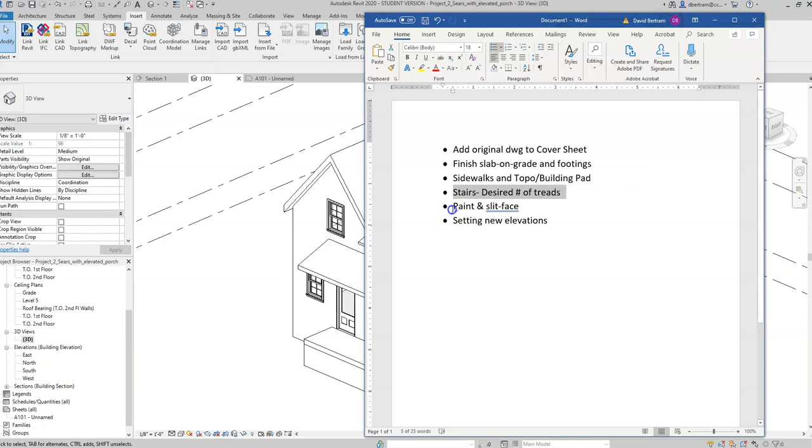So my cheat sheet here: we are going to add the original drawing to the cover sheet, which will look good for presenting the outside. We'll make sure we have a slab on grade in place, add some footings, and resolve the bottom of the house so it looks good in section. We'll add sidewalks and a topo, review stairs and fitting them in these tight houses, add materials, painting, and split face tool, and then add some new elevations. So a lot to cover.

All right, number one, we're going to add the original to the cover sheet. Here's my first image, my first title block. So I will go to image, search for my JPEG that I saved somewhere, and drop it in. That's pretty easy. Now we could easily resize as we see fit. We should make it pretty big, actually.

And then I want to create a camera view that is going to mimic this. So let me jump onto the floor plans—we don't need ceiling plans, let's close that. First floor, and this is the view that I'm going to try to mimic. So let's get a camera in here; we are kind of looking from this side, 3/4 view. So let's just start here, pull it out...

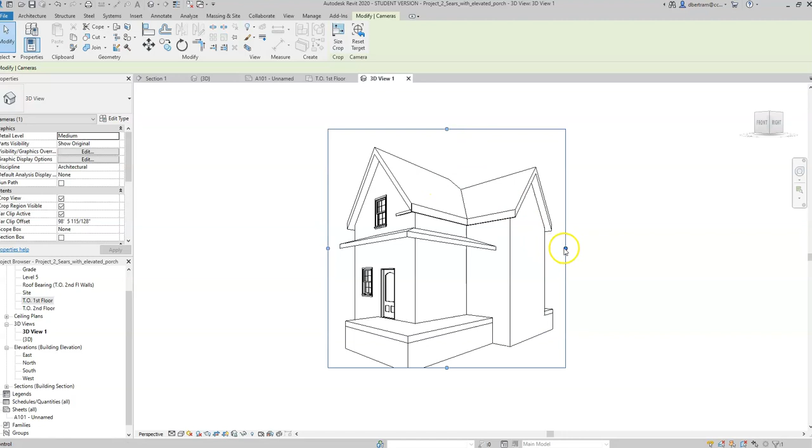Click, and there it is. Let's affect the crop region here, and then we could put that. There's my 3D view 1 I just created. Back to this sheet, 3D view 1, bring it over, click, and there it is.

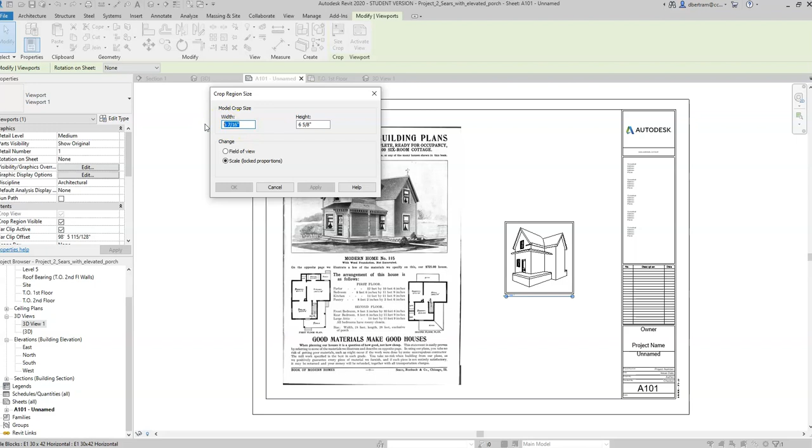Then while we have it selected, we bring up the size crop, move it to scale. Now it is about 6.5 inches. Doubling it would be 13. Let's make it 15 inches, let's see what that looks like, and apply.

Maybe a little tight. There's a good amount of white space, so I will let you fine-tune it. I think that generally looks pretty good. So what I do want to show you regardless of the sizing and whatnot—I'll let you be creative about making it look proper and nice. If anything, this is maybe a little tight, but generally looks okay.

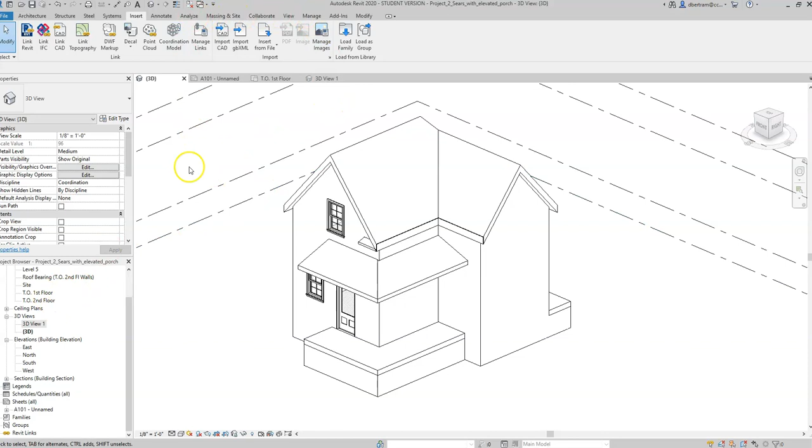But what I do want to show you is how to adjust the camera effectively. So we want a floor plan open, we need that, a 3D view is good. So this is the camera view, this is the 3D view in a section. Let's have these four open and go to the floor plan first, then click here on the view, show the camera, and there it appears while I'm on the first floor plan where I placed it.

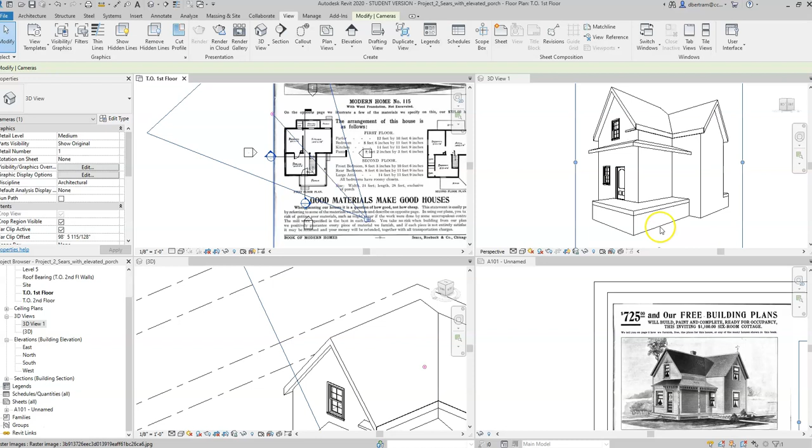And now I could go to view, tile views, and now I can see everything—there's my camera, there is my view that the camera is creating, here is my title block, and the 3D view. So let's just say, for instance, that I want to see more of this right-hand wall. Maybe I feel like I foreshortened it a little too much, and I want to display it a little bit better. So I'm going to come over here and swing it a little bit to the right.

Okay, I don't know if that's better or not, but you get the idea of how to view these. And then also recall that here is the camera, and here we have the eye—that's the photographer's eye, at 9 feet, so a little unnaturally tall, and the target is straight ahead. So if we look at theirs, that's probably not too far off.

Yeah, so you have to experiment with it. So the eye elevation, let's see what 6 feet—something a little closer to an average—now I think that doesn't really help, that makes it feel like we're looking up more. Let's just see what the opposite looks like, 12 feet.

I kind of like that, seeing a little bit more of the top—we could see more of the top of the shed roof there. So you get the gist, that is how we could adjust effectively. So let us go back to the tab view.

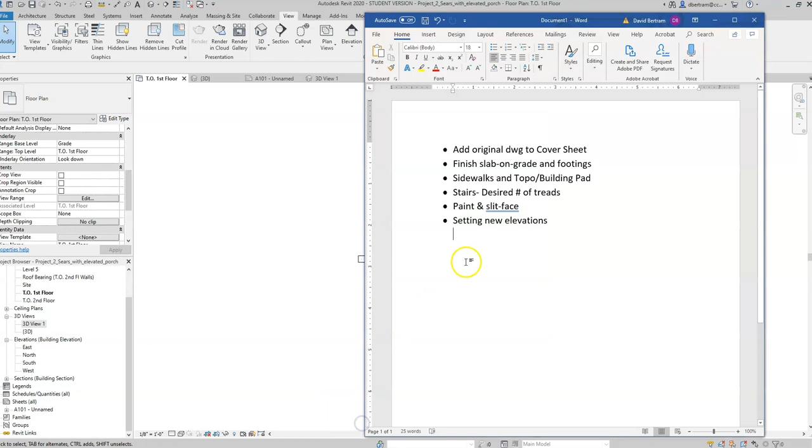Okay, good. All right, next up on the to-do list is finishing the slab on grade and the footings. Okay, so let us take a look at the 3D view.

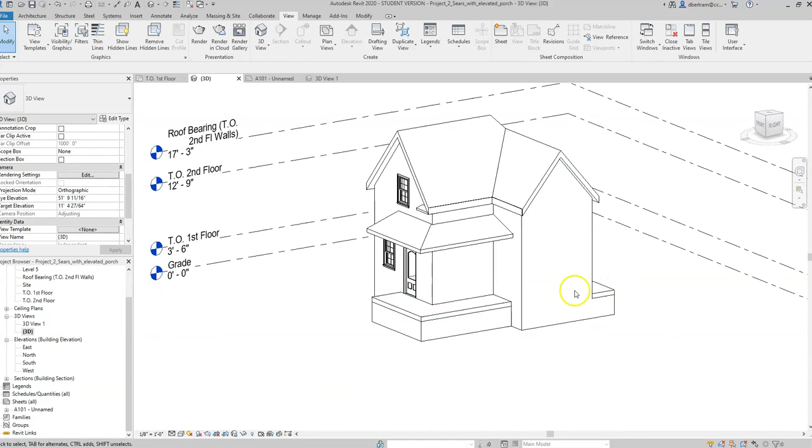Okay, so let's look upside down. We have our porches, front and back, and then our house footprint. When we look from underneath, that is what we see. Here is our house footprint, that's what's holding up the second story, these walls. Then our porches are lighter, they do not carry the weight that these exterior walls are carrying.

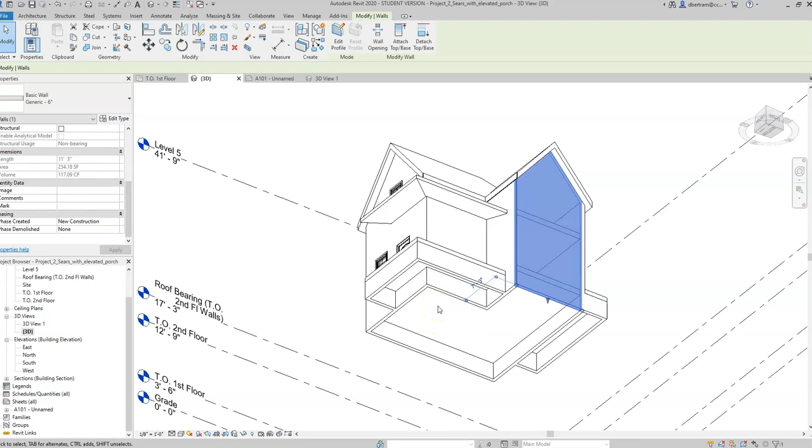So what we want to do is select these. Let's select this, I'm going to hold Control and select the bearing walls for the house. And here in the property box, we're seeing that the top constraint is where I originally set them, to the top of the second floor, and they're starting at grade.

I want them to come down about 3 feet below grade. That's appropriate for here in Pennsylvania. Apply. That is the bottom of the frost line. If you're in Florida, you don't have frost, there's no freezing ground, so these footings could sit right up top. If you're up in Maine or Michigan, the footings would probably be down 5 or 6 feet or so. But here in Pennsylvania, it's 3 feet, so that's where that magic number comes from. And so when I look at buildings in section, that's kind of what I'm used to seeing, so that's why I'm applying that.

These should also come down, so I'm going to do those as well. In real life, these would be built up really with just some columns and not have these continuous walls, but in section, this will be more acceptable than having them go nowhere, sitting on grade, when I say go nowhere.

So the top offset is set. We want the base offset to go to -3 as well, so it'll look a little more believable in section.

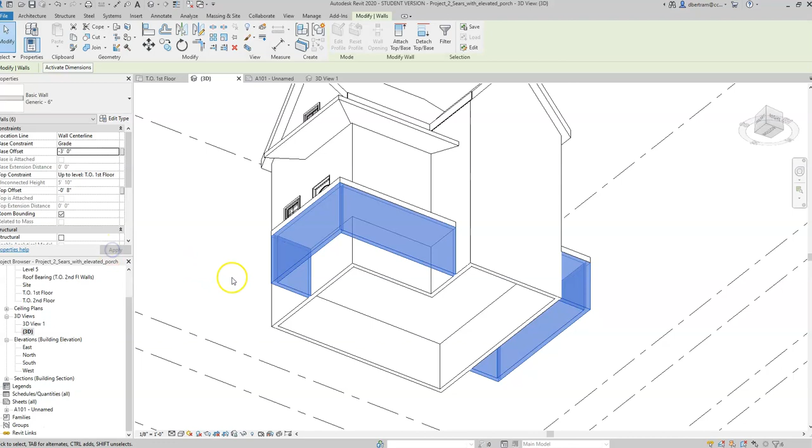And then let us add the footings. So we will come to structure, here are our footing options under foundation. We'll come to the wall, we will find the most modest is a pretty big footing, 24 inches wide.

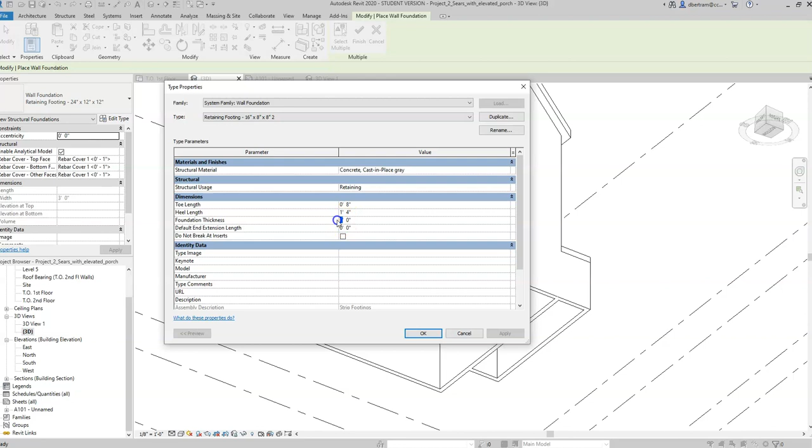So let us edit the type, duplicate it. Let's turn 24 to 16, and then let's go with 8 inches. 12 becomes 8, and 24 becomes 16, and here's our 24 that becomes 16, so that's 1 foot. 16, 1 foot 4, and our toe length 8, and thickness 8. Let's see how this looks.

Okay, and then we just apply them. So one more time, structure, wall footings, and here they come. And this is just for the parts that hold up the house, not for the porches. Okay, let's take a look at that in section. Not bad, not bad.

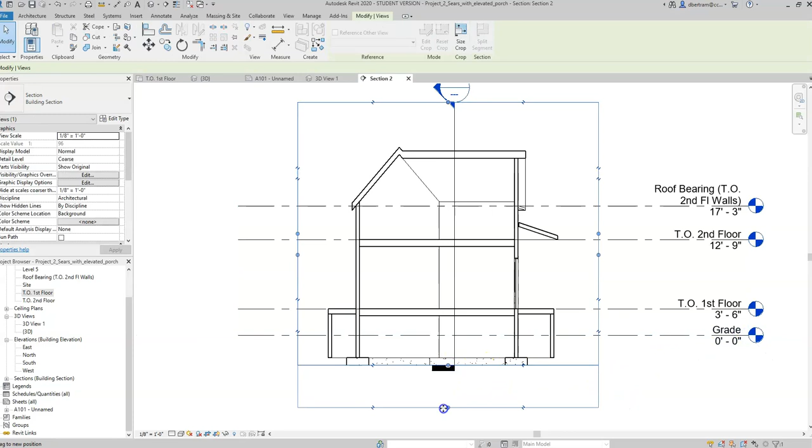And then we need some sidewalks so we could see where grade is. We see the word grade there, but it would help a lot if we could see grade. Let's give us a little more room here, let's open up our bounding box, crop view. Okay, space everything out, a little bit easier to read.

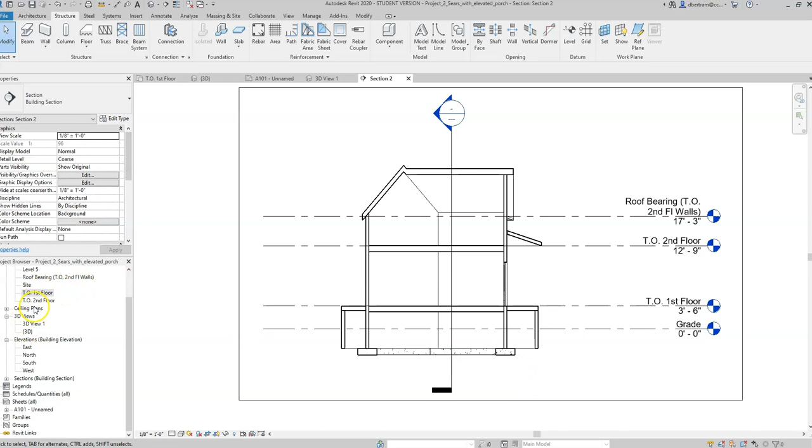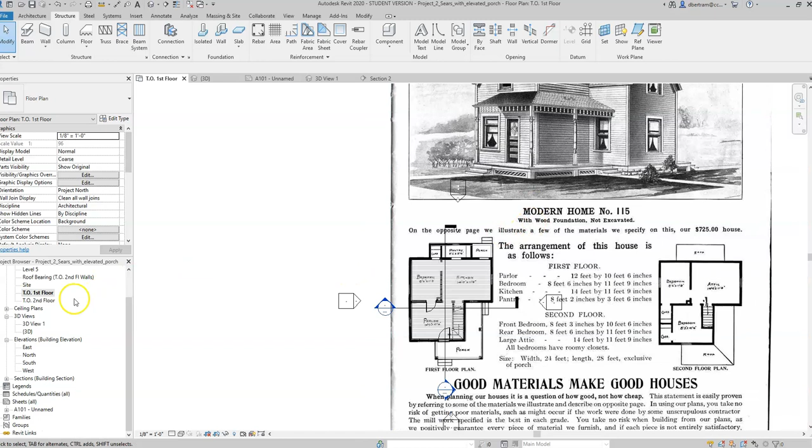Okay, so grade, we want to get some sidewalks. So let's take a look at our plan, and we don't have anything to go on. Some of these old, so we do have this. So we have sidewalks coming straight out both sides, and they kind of put us on a corner lot here. So let's do that. All right, so let us go to, we're on our first floor.

Let's see what this looks like at site. We can't see our stairs. It's a nice roof view, nice roof view, we'll maybe circle back to that, but let's do the work right here. And we could hide this, this is not really offering us much. Hide in view, element. Okay, we could see, hide in view category, again, need a little bit of space.

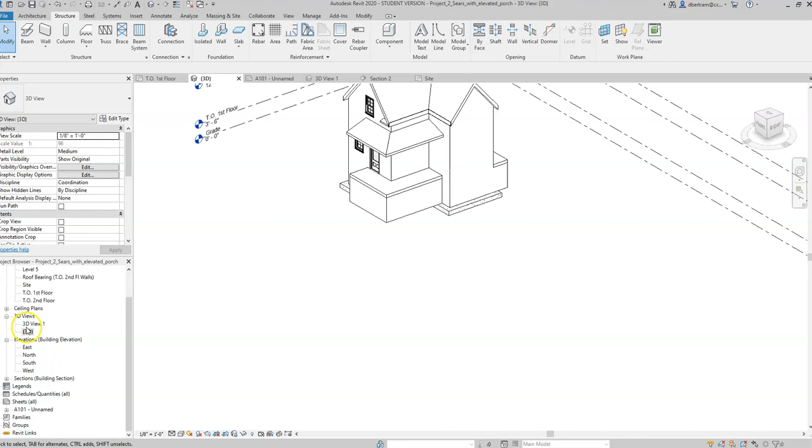Let's take a look at our 3D view. Okay, I do not have stairs yet, let's put some stairs on this, straight ahead there. So architecture, stair options.

I am going to go with, because it's outside, the cast in place. Stairs inside the house should be the assembled stair, that looks best in section. Outside, we'll do a monolithic big concrete piece. We're going from grade up to the top of the first floor.

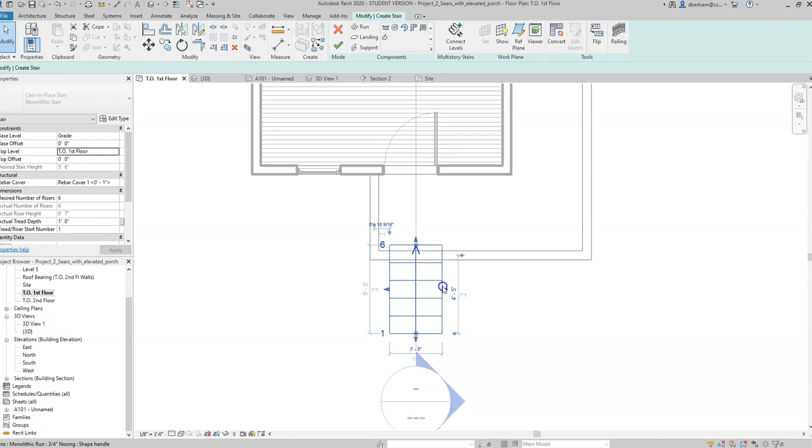We can select, pick it up. Let's just pick a number, let's get a measurement. Let's give it the green light, even though we don't like the size.

Let's say we want our stair to come from the middle of our door to a little off there. 1'10", so that double 1'10", and we get 3'8".

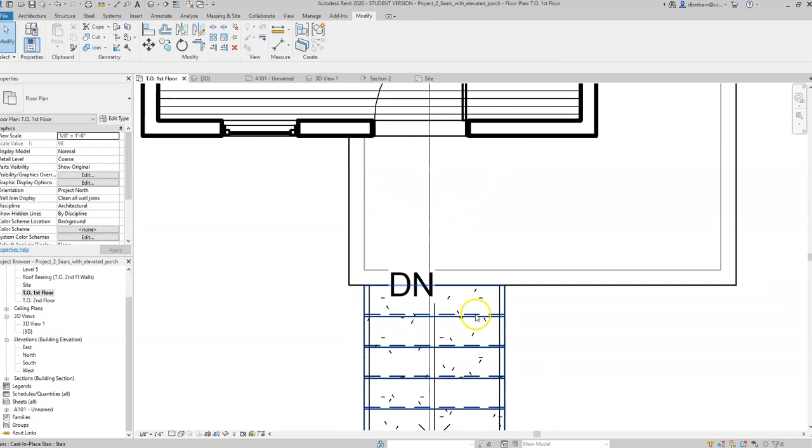Okay, now let's center that. So we have a 3-foot door, and our stairs are a little bit bigger. And give that the green light.

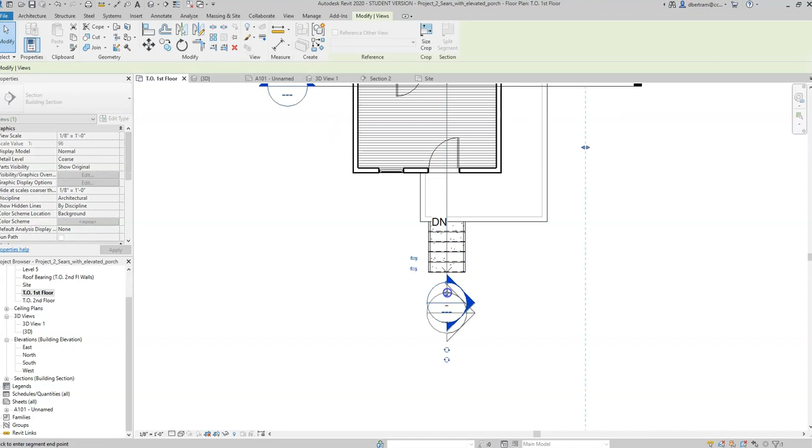Just a little more space. This all got moved about. Okay, and that looks decent. It too would have a foundation, but I think we could let that go. Yes, so looking better. We need some columns, but this is looking better. That's what we should be, about 3 feet below grade.

Okay, so what's next? Let's just take a look at that in 3D, make sure. Oh, so a topo is, oh, and then our topo and sidewalks are next. Okay, so...

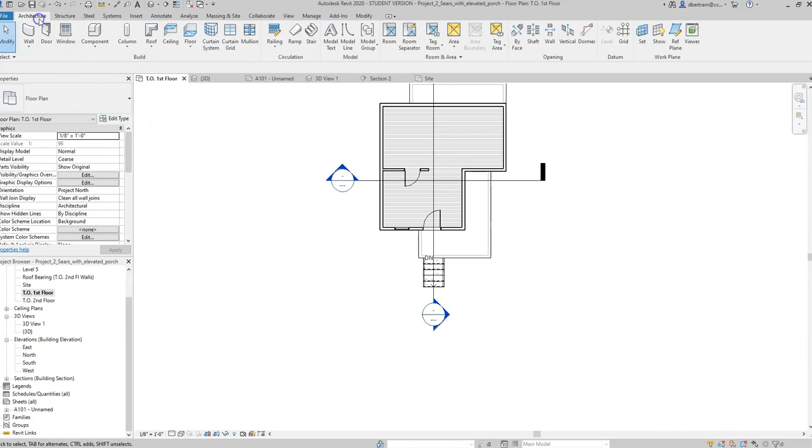Do we really have on this? I'm just going to pretend like there's one staircase. There might have been another staircase here, but I'm going to keep this simple. Okay, so back, we could draw this on the first floor, and so I would just do this as a floor.

Trying to think about what size I want. So we'll just come here, edit, duplicate. Let's just make this, dedicate this just to the sidewalk.

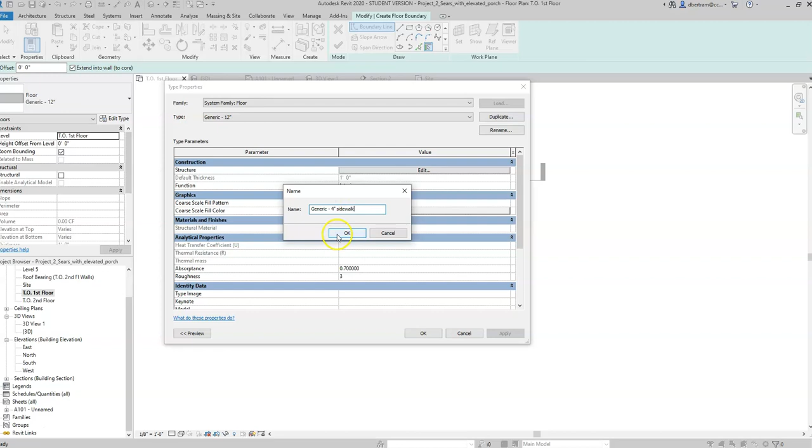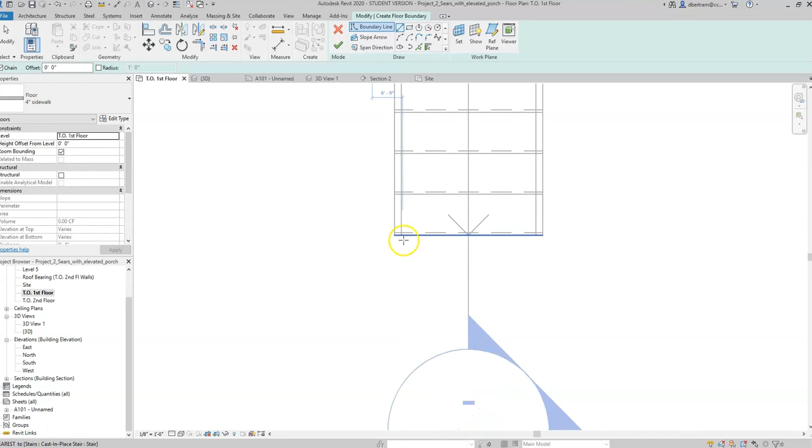Okay, 4-inch sidewalk and some boundary lines. So I'm just going to take it from my imaginary sidewalk, and this I'm gonna put a little angle on it.

So it would be 3 feet would be nice. And I'm just going to come straight up and make it 3'6" on the angle, which doesn't really exactly answer my question. 3'3", so I didn't get my 3, so it's about 3'3". So we're coming here. I'm going to do this by eye and not overly worked up about it.

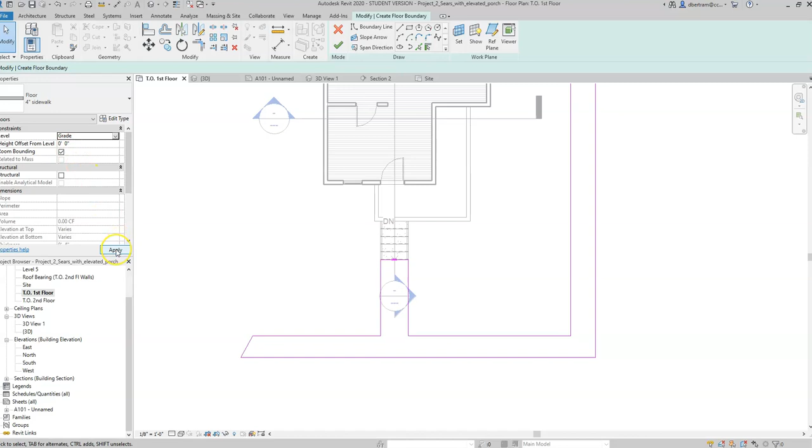This matters, let's. Good. All right, and we are not at the top of the first floor. We are on grade, and that should do it. Apply green light, and take a look outside, and it looks like we have a sidewalk.

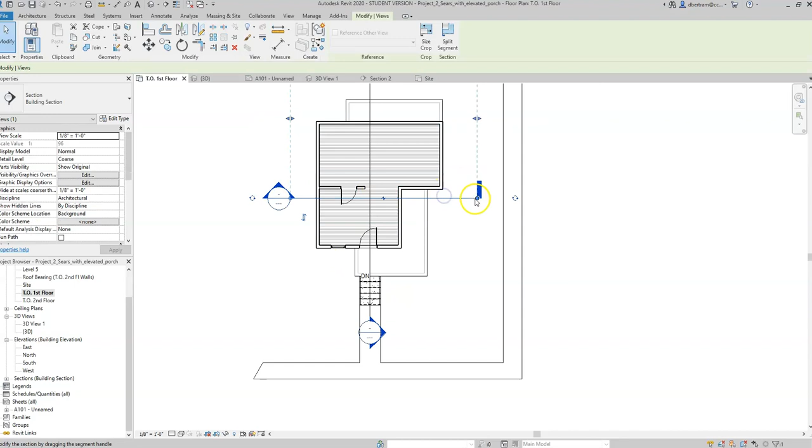Okay, and let's take a look at that in section. All right, that looks good. Now we want to put in some grass and learn a new feature.

All right, so let's jump back to our first floor plan and let's put in a topo. Okay, so this would be under, where does this live? Massing and Site. Massing and Site, Topo Surface. Okay, so they're not on view here. They typically like us on our site plan.

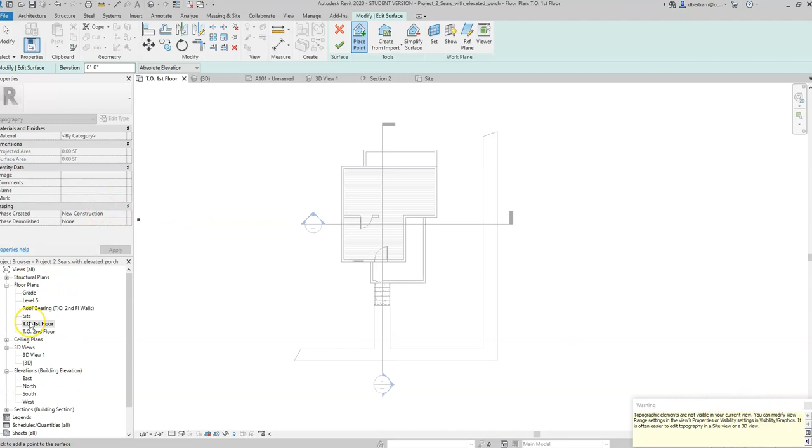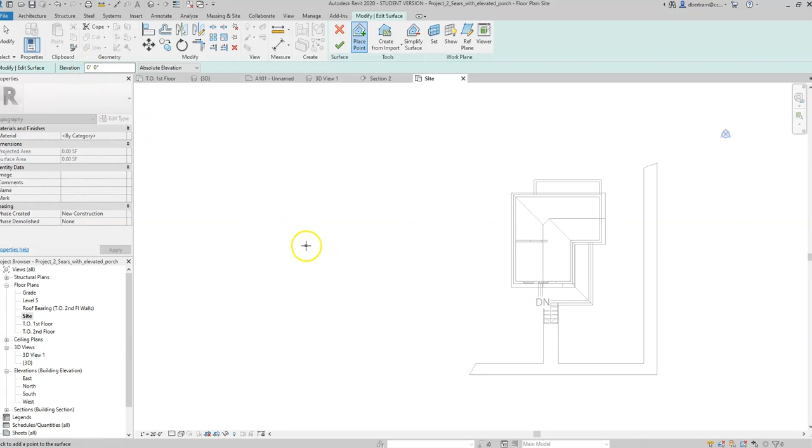All right, I'm just going to jump out of that. I want to hide these things. All right, one more time. Topo Surface, good. All right, so let's make this a wireframe so we could see. And what we're doing is adding a three-dimensional surface, and I'm going to do one right on the side to make this clear. So drawing some earth, and all those elevation markers are coming out at 0, 0.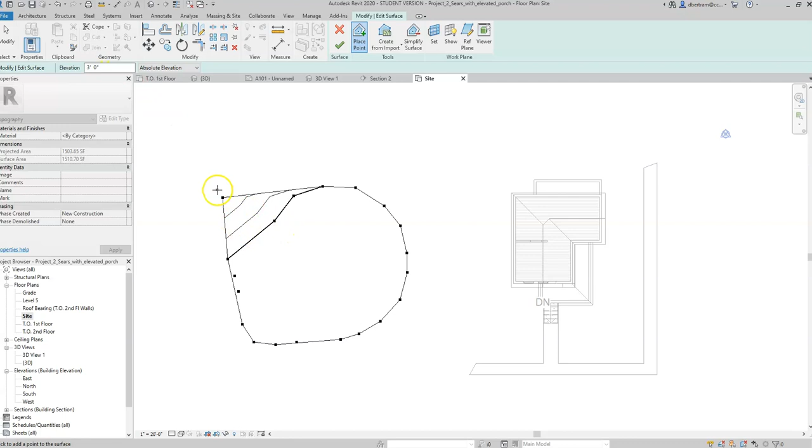Now if I add one, let's just add one that's 3 feet tall. And now you could see those grade lines that are appearing. And then if we look at it in 3D, and then give it the green light, let's actually first look at it right in elevation. So my elevation markers are not showing it.

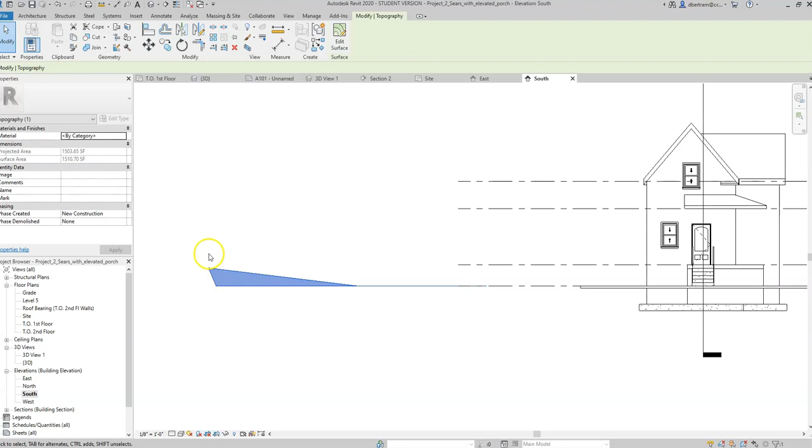Super quick. There. Okay, so all those elevation markers had this were set at 0, and that's why this is all flat. And then I dropped in that one 3-foot one, and it jumped right up to here. So one of them is at 3 feet, and the others are all laying perfectly flat.

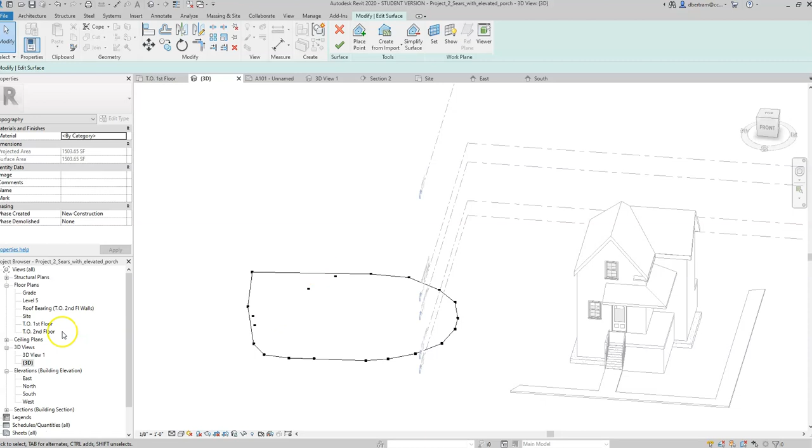And then I could select this element, edit the surface, select that guy. That's the 3 foot. I could take him back down to 0. Did that work? Yes, that should have worked. And then if I look at it again in elevation, I forget which elevation I was able to actually see that thing in. There it is. It's all lying on grade.

And then back to the site. And then if I wanted to place a new point, I could come here, and then I could drop a 3 foot right in the middle. And now I'm kind of creating, I just put like a tent pole right underneath my carpet or underneath the sheet there, and then it just pushed it up so that I have a kind of a tent, and you kind of see it.

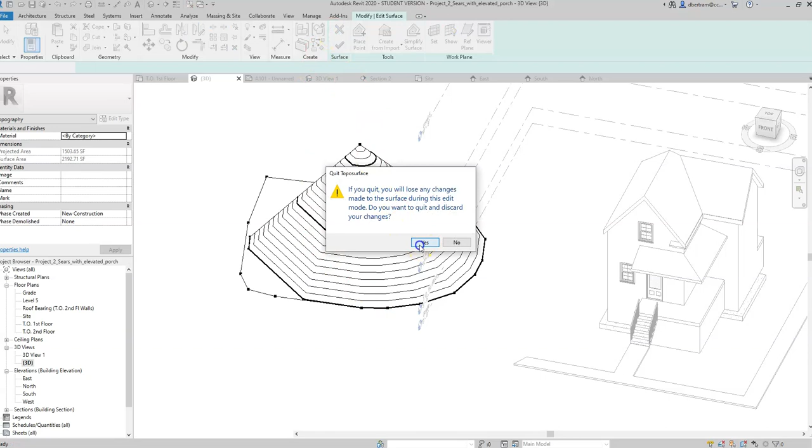Let's exaggerate that. At 3 feet, let's make it 23 feet. There we go, so there's my tent. Okay, so now we can do away with that. That is the gist of them. The way I just drew this is super flat, so we're not going to have any such adventures as building kind of pyramids in the dirt.

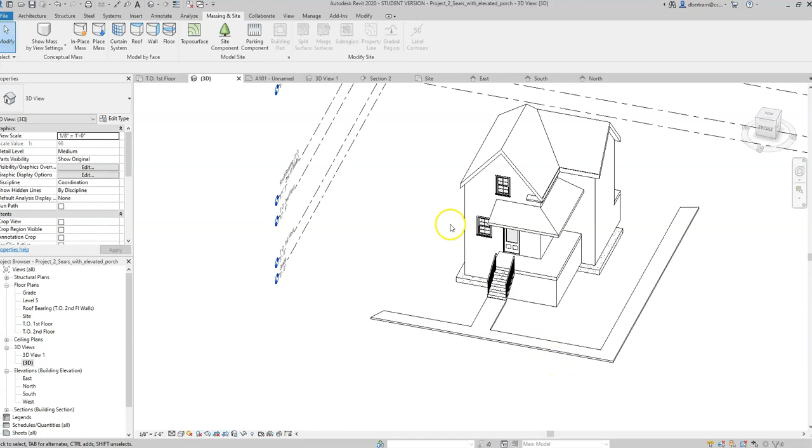But nonetheless, it's a good exercise to go through, and we could keep it simple. You could play with it all you want. Actually, you could set up a backyard if you want.

But I set up the earth to be very flat on these two sides, but then maybe we could taper off and do something on the other side.

So let's jump into site, and I put this on wireframe because it was showing me just the roof plan. When I put those points down, I have to get all the way up against the house, so I cannot drop it at the edge of the roof, otherwise there will be no dirt connected to the house. So wireframe, Toposurface, we will put this, let's take a quick look at elevation.

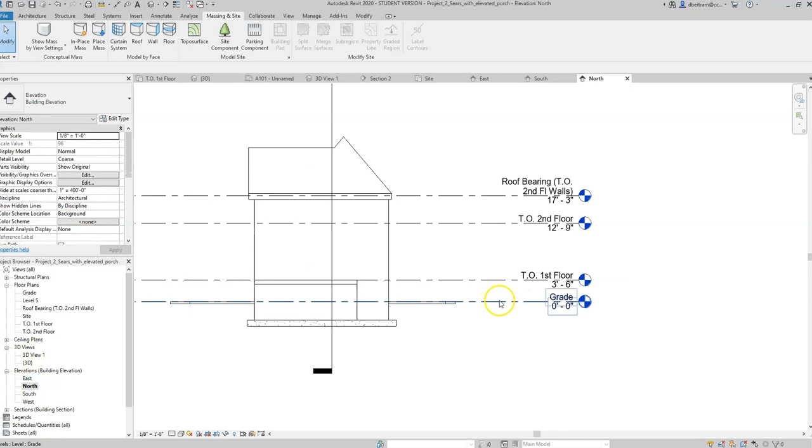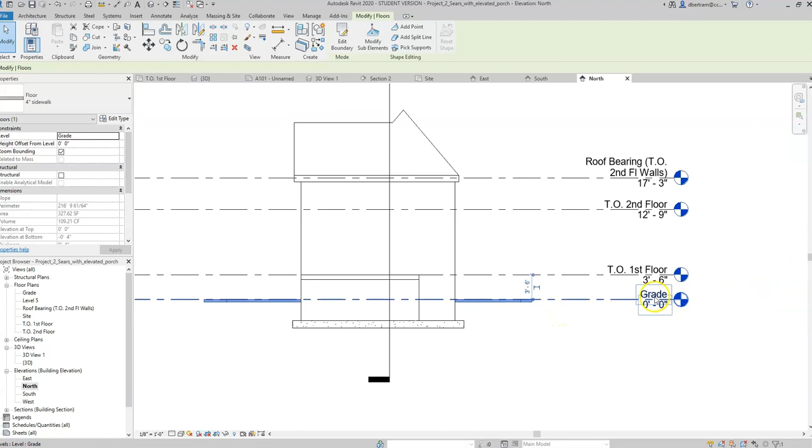Let's just cancel that one more. So we will put this at, the sidewalk is coming in at grade, and I would like the earth to be about 2 inches below that. So I'm going to put the earth at -2 inches below grade. So grade here actually represents my top of sidewalk. So this is not the best title really, this would be kind of top of sidewalk, and grade's a little bit below that.

And I'm not going to change this because I have stairs that are properly connected to it, so I don't want to undo the stairs. So I'm just going to cheat my earth down 2 inches.

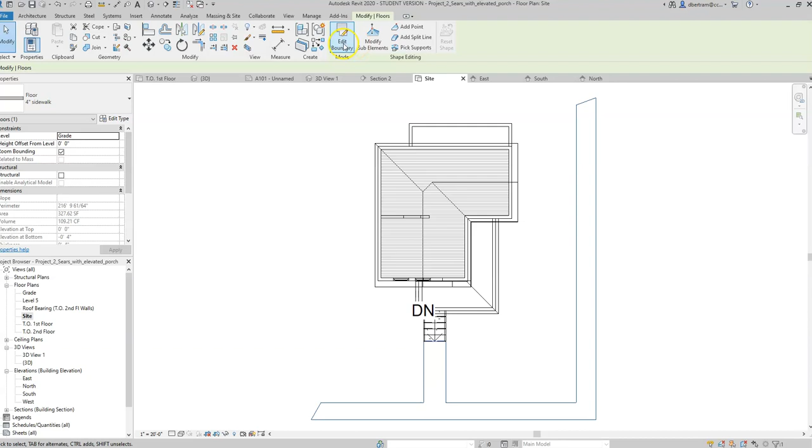So back to site, and let us, where are we? Are we in edit boundary? What do I have selected? Here we go, Topo, and we are going to.

Negative 2 inches, and that's relative to grade. And this is going to take us, so again, a little tricky. We have, I'm going to draw it, so I want earth tucked in here under the stairs.

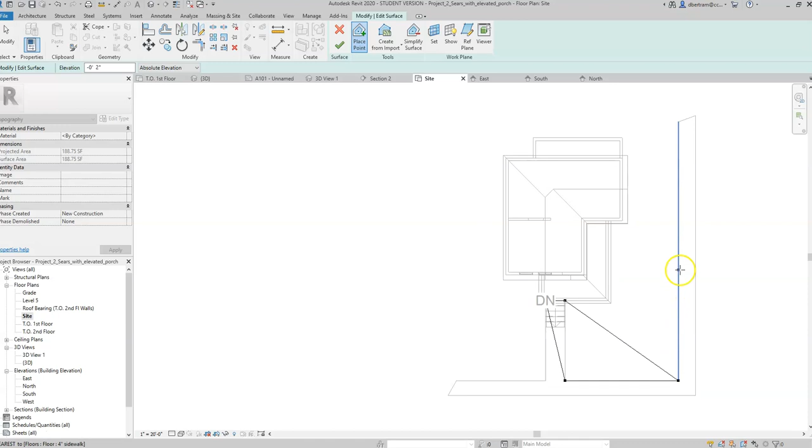So I'm going to start it here at the back of the stairs. Let's see if I could remember all this as I move around. And it's going to start drawing some funny lines. It might appear as if I've done something wrong.

I'll change these later.

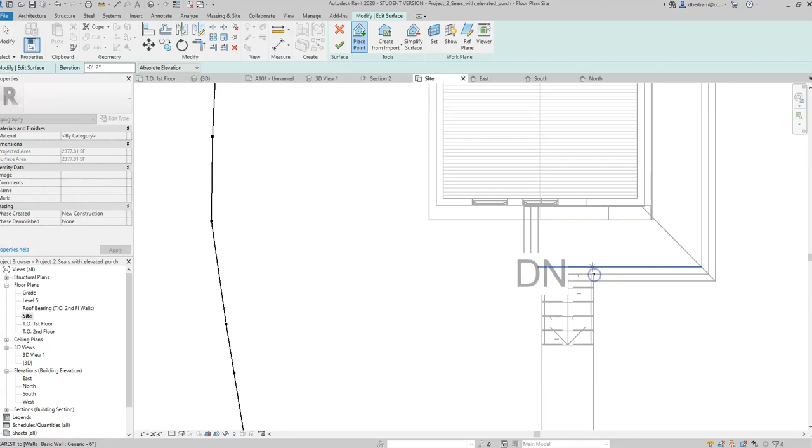Okay, that is one group, and then I will put in a second group, placing points, so this isn't much drainage, I'll just move that 1 inch.

And these against the, in real life and in drawing, they should be a little more exaggerated than 1 inch. Let's see what that does for us.

Okay, and let's give it the green light and check it out in section. So let's open this up a little bit. Where's our other section?

Okay, so we see the earth there, so we have to add a topo surface. So I have earth, well, no, I do want earth in there actually. If we had a full basement, we would not want earth down here. Then we would have to do something, but in this situation,

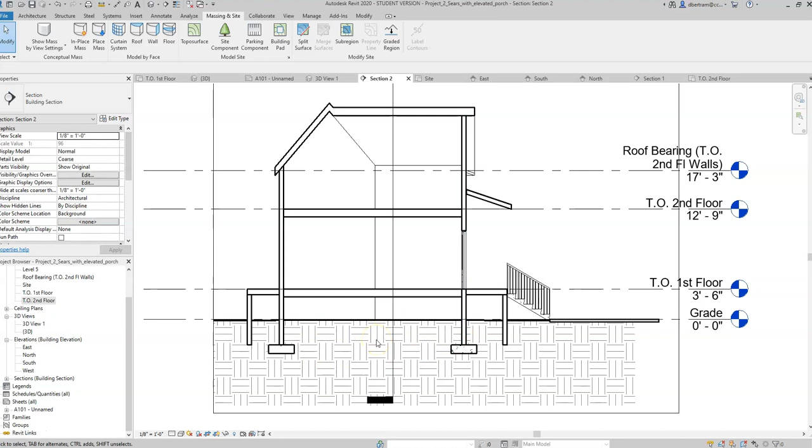we should actually, it should be dropped a little bit right there. So we would want to add a topo surface, I believe. Let's see how that works for us. A building pad.

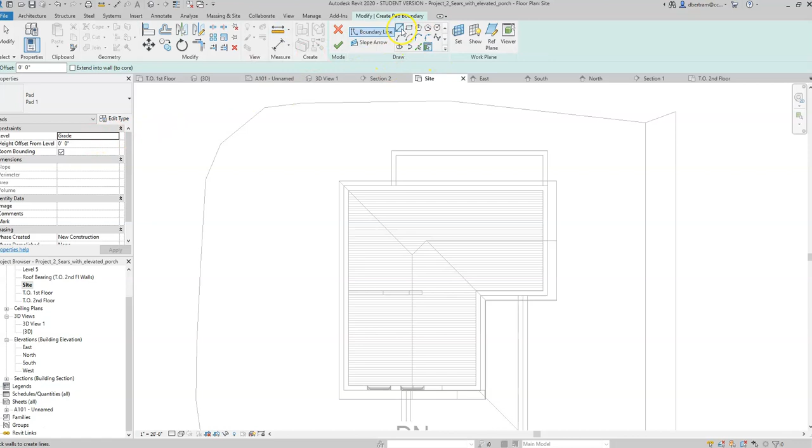So, building pad. And we will draw this at grade, and this will remove, so now I'm going to draw it inside the foundation wall. And this should remove the earth from inside here. Let's see if that works. Green light.

And yes, it's thicker than it needs to be. Height offset from level. Not sure why it's showing as deep as it is. That doesn't really make sense.

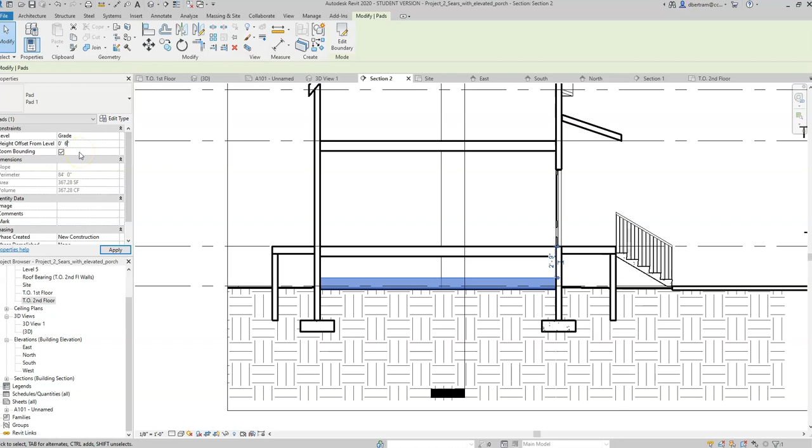Alright, that helped, not 9 inches, so maybe it was down 12. I'm not sure what the logic was right there, but that looks better, that's our slab. Yeah, that looks better, that looks fine the way it is.

Okay, so I had to adjust the height of the building pad. So the building pad takes away the soil from inside of a space, and if you had a full foundation, that would be especially important. But in general, this looks good. Yeah, so you can see a little bit of a drop there.

So let's just jump right into site, select, edit, and I'm going to grab these guys. Let's make that 12, and let's just see. Hopefully I'm not causing problems.

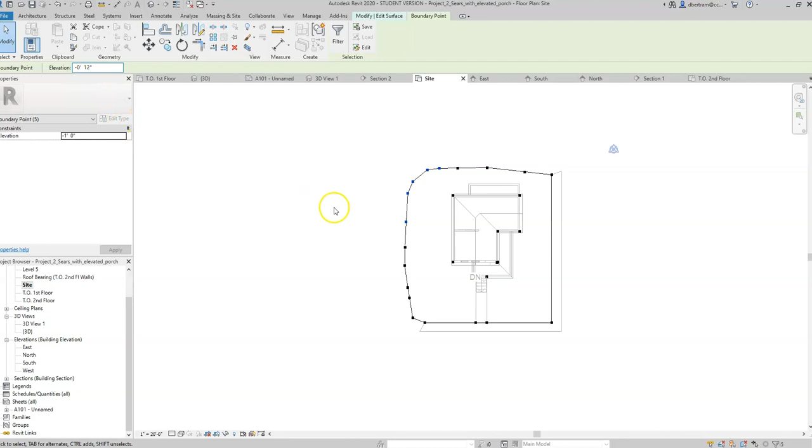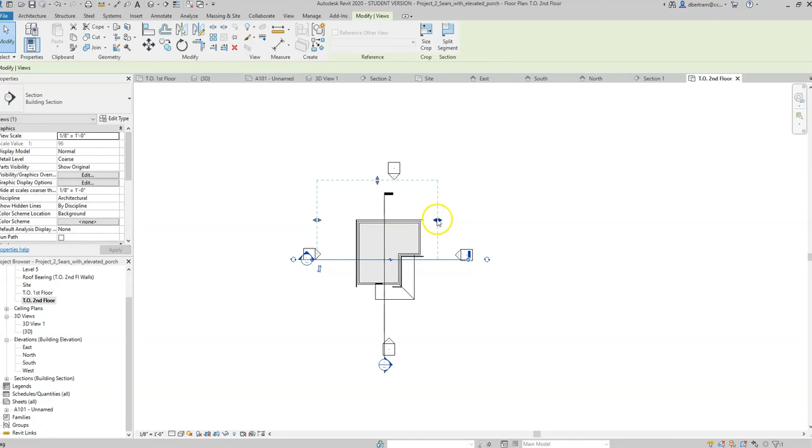Not even noticeable here. Maybe it's probably more noticeable on this other section, perhaps. Yeah, it's beginning to be a little more noticeable there. Okay, so that is our site plus topo plus pad. Let's just take a quick look at 3D.

Okay, let's jump into a realistic view. Okay, let's apply a material to it. So we select it and we come right into our property box here.

And then we can select By Category here, it'll send us right into the material browser. So I set this up already. So let's just cancel that actually and just start from the beginning.

So if we're not selecting, not going to the material box the way we typically do with walls, just know that you could find it here as well. So manage materials, and then we could create. So that's what I did.

I just came here, created a new material, applied grass to it, so that when I came here and I arrived here, it was already loaded. Okay, so this is the stuff that's already been created and loaded, and you can do it both in the same place like with walls. Okay, so then let's just say okay, and we have grass applied.

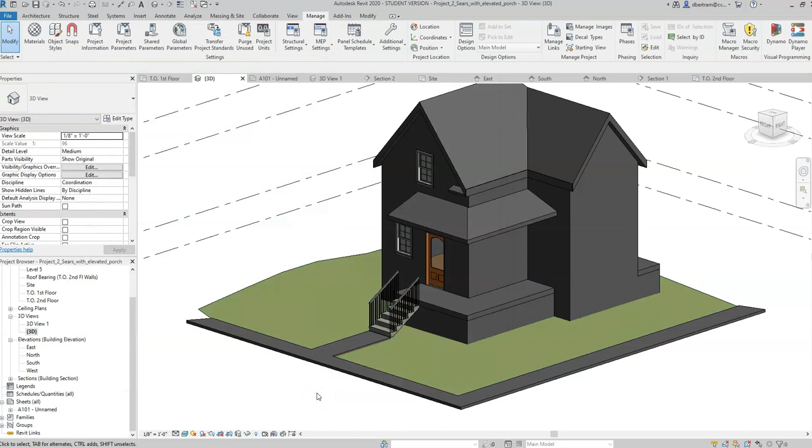Okay, I'd like to show you the paint tool now. So here we are in a 3D view. Come up to our modify tab, and here is the paint tool. So adding paint, removing paint.

Once we click on the paint tool, it opens up our material browser that has all of the materials created for the project loaded here. So what we have to do to make sure that what we want is in there, we have to go to Manage Materials, and then here, you know, the material browser.

So this is, we get there by way of walls. If we're changing a material on a wall, it'll take us here, and we could create a new material, rename it. I already created an exterior siding one. I'll just call this wood siding.

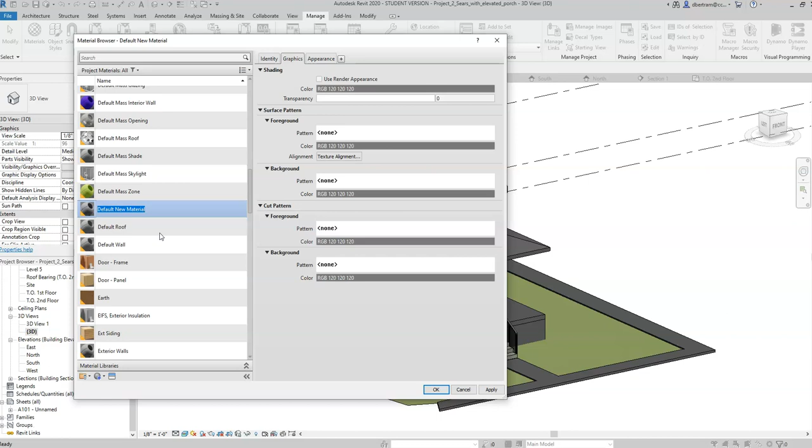And then we could come here, siding, not too many options. The appearance library has more siding, and here we have clapboards, all sorts. So let's go with wood horizontal cedar. Click over, so now it's populated.

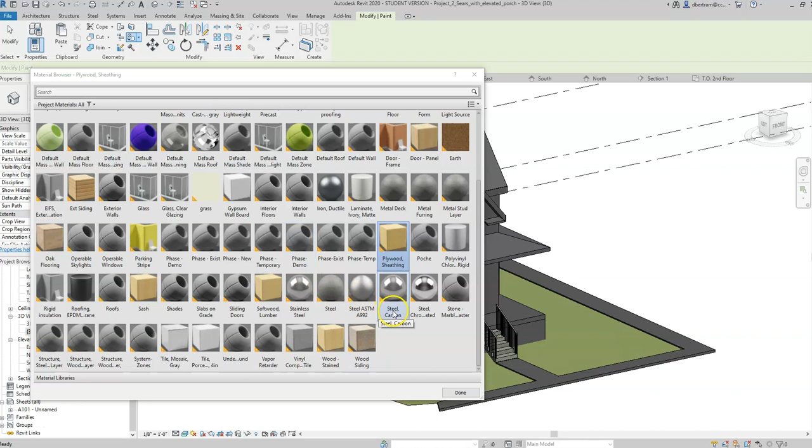And now when we go to modify paint, this opens up, and what did we just create there? Plywood or wood siding right there. All right, so now this is in effect, this box has to be open, I have to be on it.

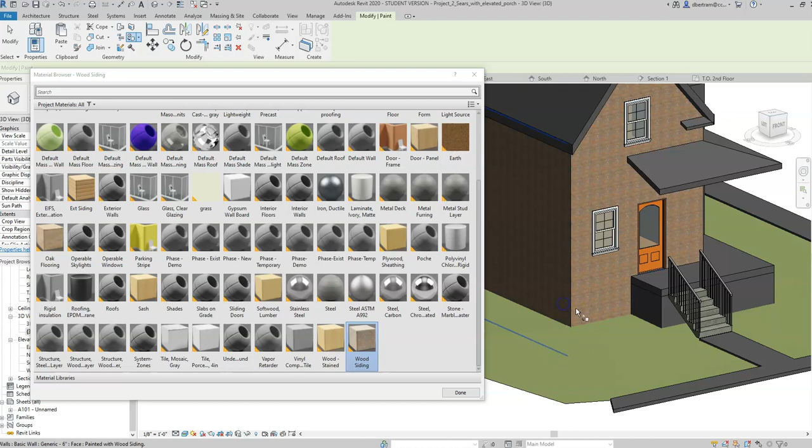And now I come and I do the selecting. So there it is. I just applied that material there, and I could keep going as such. Okay, that is painting.

Okay, next I'm going to build this staircase. One of the challenges is that the staircases were very tight, probably not code compliant today, especially this triangle piece. But I'm going to draw what's here regardless of code compliance or not.

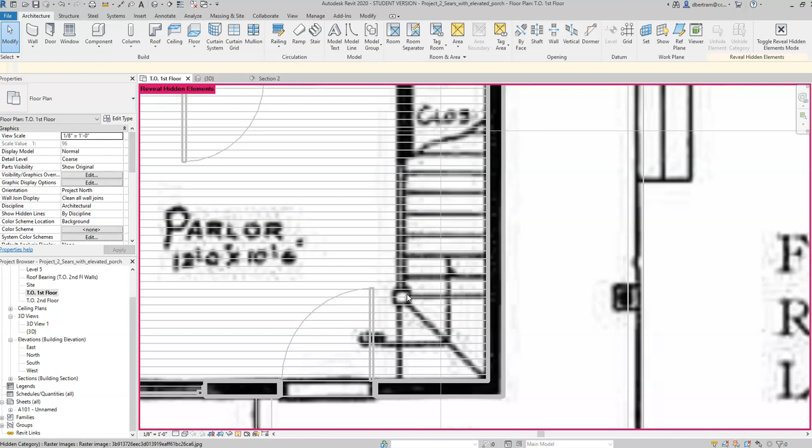And what I think I'm going to do is cheat and make this, so there's a step up here and then a step on this winder here, and then the staircase run goes. So there are stairs with landings in Revit, but I don't know that they'd allow you to do this, and I'm just going to approach it a different way regardless.

So what I'm going to do is create some floors. So floor. I will duplicate this one, and I will make this 7-inch stair floor.

And that's all good. Okay, and let's just jump right into elevation quickly and see where we are, or section would be better. So sections are here.

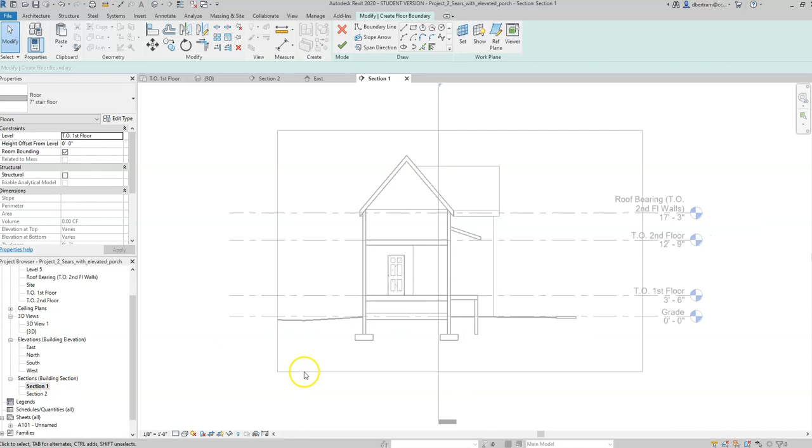Okay, so we are going from the first floor to the second floor with this staircase, and if I drop a floor in, my new stair floor, it's going to come in right underneath here. So I'm going to jump back there, rectangle, first floor, plus 7 inches.

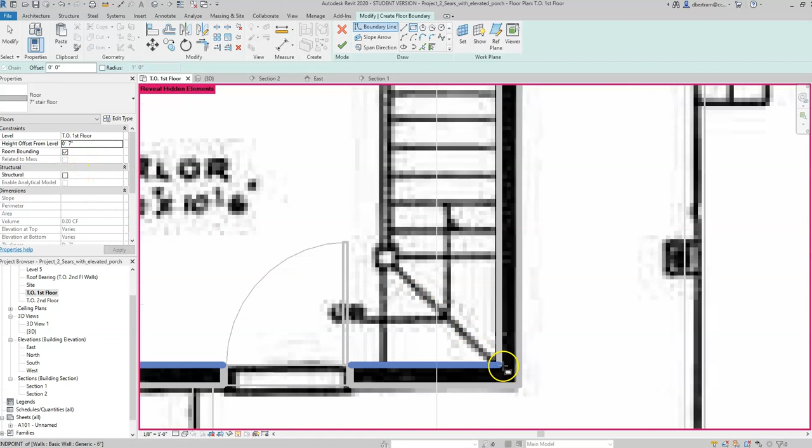And I'm going to start right in this corner and come to what will be the platform, plus 7, and that hopefully worked. Okay, and then let us jump into that section, and there it is. Looks good. All right, back to the first floor one more time.

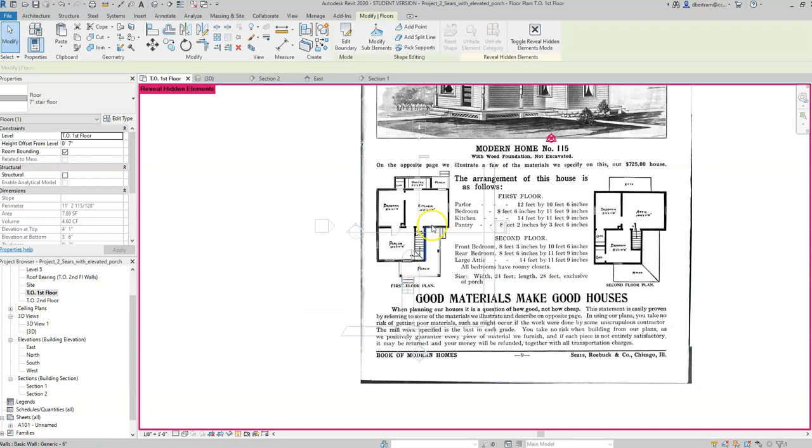And let's do it one more time. So, architecture, stair, first floor. No, not stair. Sorry. Get out of the stair. X out of the stair. We're doing floors. Floor.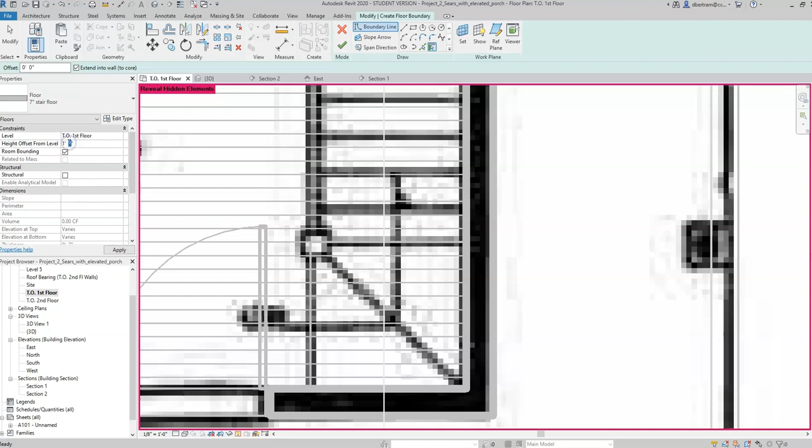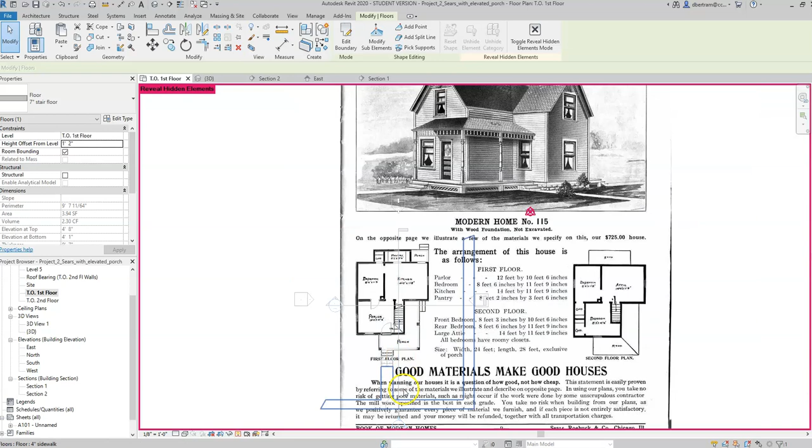First floor, 14 inches, or 1 foot 2 inches. And I'll snap right to that one that I have started, into the corner. And give that the green light. Check it out in section, and that looks good.

Okay, one more, and then let's do the stair itself. These might actually look better if they were pulled out a little bit, but let's draw the stair first, actually.

So now we will do stair, and we will do the assembled stair. We are taking off from the first floor, that is correct, but we're taking off 14 inches above it. And we're going to the second floor. And we're going to start right here and pull it all the way out.

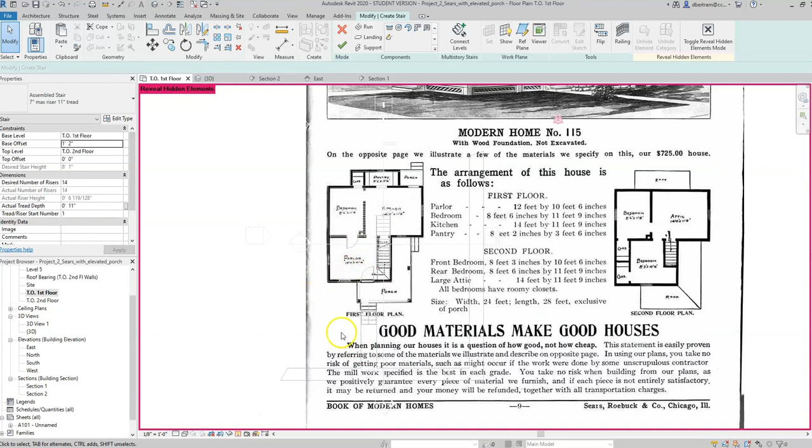And you can see how far that thing still wants to go, even though I shaved off two stairs, it's still reaching way into that room. Let's take a look.

Okay, now the stair is in and it's extended very far. And here we have to give it the green light, so it is at the proper height. It looks odd here, so these should be extended.

That's what I was hinting at when I was drawing them, that I knew that they'd be better out here, so this was sitting on it. So that's one thing we could do, is extend these underneath, because this would sit on it. And then here, this is correct.

So this is the top stair, and right here, this is the top of the stringer gets hung right on that, on the floor right there. So that's where the last stringer should be coming in, about 7 inches down. So what I want to do now is give it the green light, and then I'm going to notice how this changes here. So we have the desired number of risers, so 14 steps up, actual tread depth.

So maybe we could just change it right here. Let's just change that to 9. No, this is saying that there's something within the specified stair type. All right, so cancel, let's just keep that at 11.

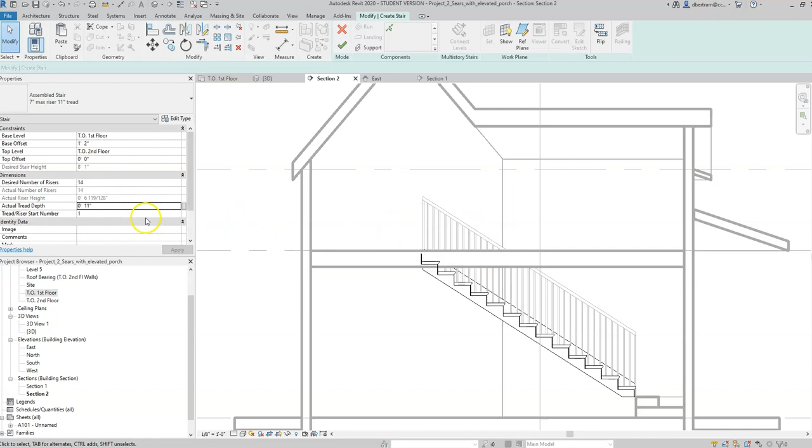Give this the green light. Now it's done, select it, and edit the type. Now when we come in here we see the minimum tread depth, and that's 11. So this is code today, and 11 is safe - that's the distance for us to put our foot on the stair.

You're not going to get maybe a little bit less than 11, 10, maybe the actual code's 10 and something, I don't recall, but this is safe. Back in the day when these were designed, I suspect it was not required, because I've been in plenty of old houses where they're not nearly 11 inches. My old house from 1902 has third floor stairs that are very tight in that regard.

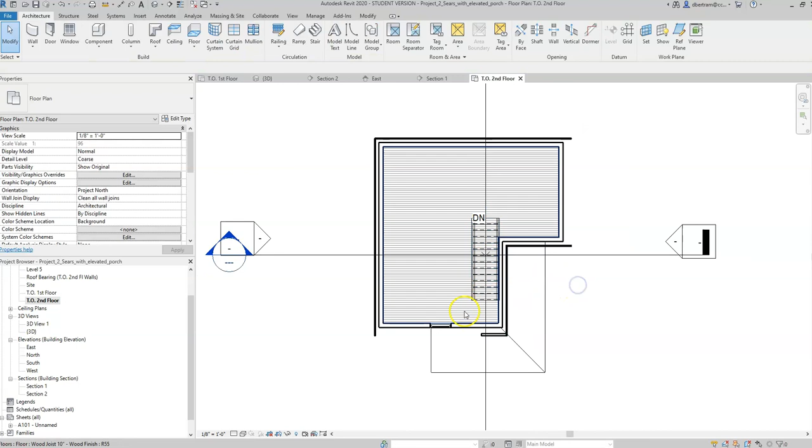So let's say, okay, move it to 9, and then here the actual, again, move that to 9, and we could see it all tightens up. So a treacherous stair, but it just saved us a lot of space. And it's still jutting into that room a little bit, but I think we'll just let it go at that. And then let's jump into the section.

Select the floor that we need to edit. Let's look at this - where were we? Maybe on the second floor. We could see the staircase. Good, so now we could open this up.

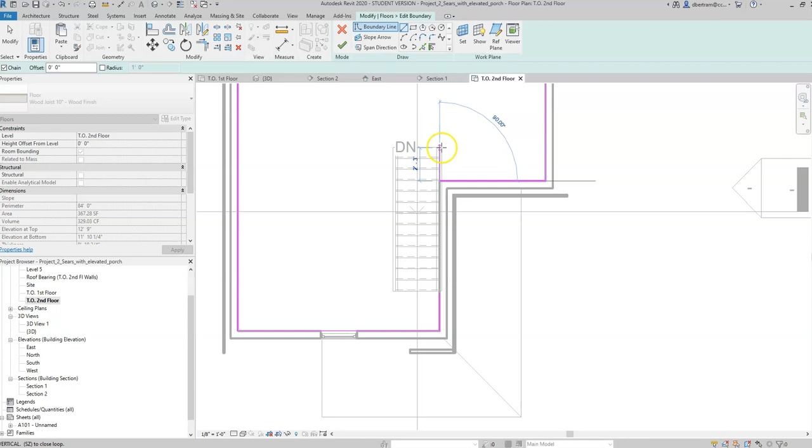And it looks good. Correcting these is easy - edit the boundary, take us to the first floor. Yeah, that's fine. So now we could select and move one stair in.

Green light for that one. Select the rectangular one below, and bring that one in as well. And so the reason I showed this is so there are ways to do

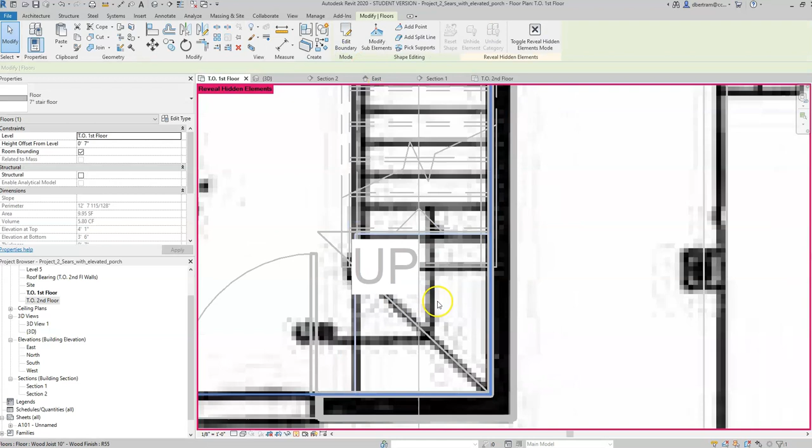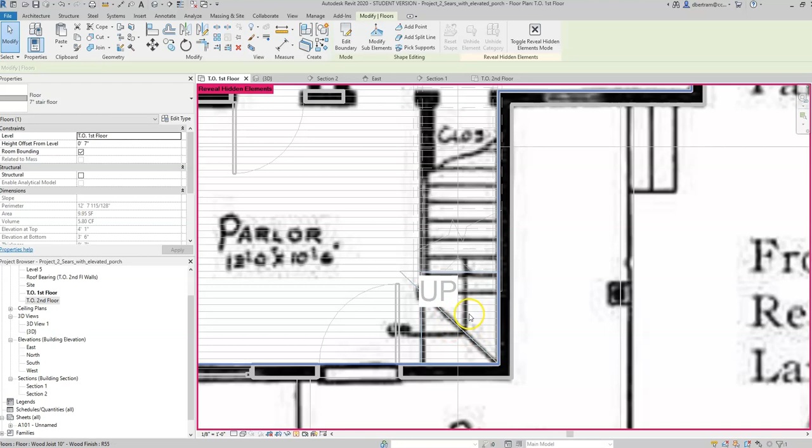landings within Revit, and if you have a new modern code compliant staircase, it's worth exploring. But it's also, in some circumstances, worth thinking about other paths to solve problems, and that's what this was an example of. But let's jump into there, and now we look pretty good.

So now we have a stair that's sitting. Okay, very good. I think... oh, so the last thing was just setting new elevations. I just wanted to make a note of that.

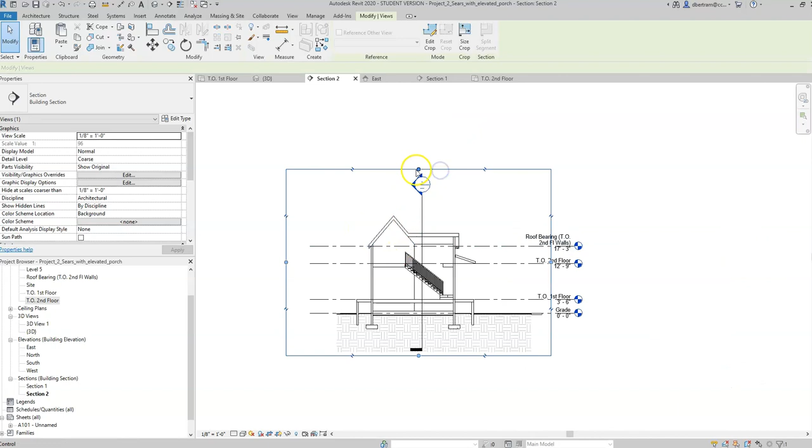So if we wanted, for instance, to put a dormer right in here, do I have my roof? Yes, I have my roof is level 5. Okay, so

elevation - so this is just creating working elevations, not to be shown, not to be displayed. So this, for instance, we could call this dormer bearing, and you could accomplish this just the same by setting a wall here and just adding 3 or 4 feet to it using the offsets. But sometimes you don't have to do the math, or it might be easier if you just add new elevations to accomplish these things.

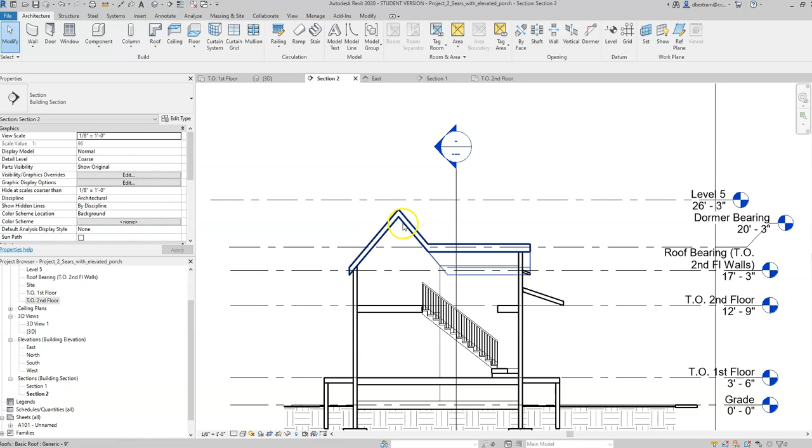So I'll go up to the roof plan, and then I'll add a dormer there, or at least the walls for the dormer. So level 5 is where I want to head to. There it is, and then wall - generic wall is fine, and we are going to our dormer bearing.

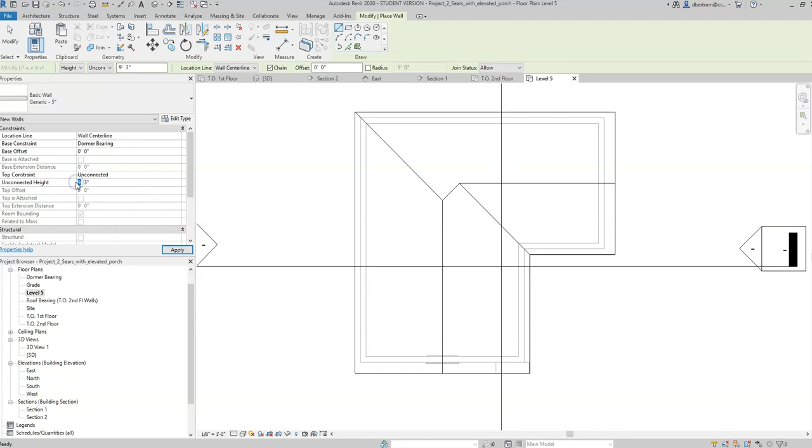So unconnected might be fine - that's definitely not, let's just do that, because the only thing above it is the roof, which is way up in the sky. We don't want that. So let's try this, and then we could come in here and begin our dormer, which would not be facing... should really be facing more like in this direction, I believe. Something more like that. Let's take a look at that in 3D.

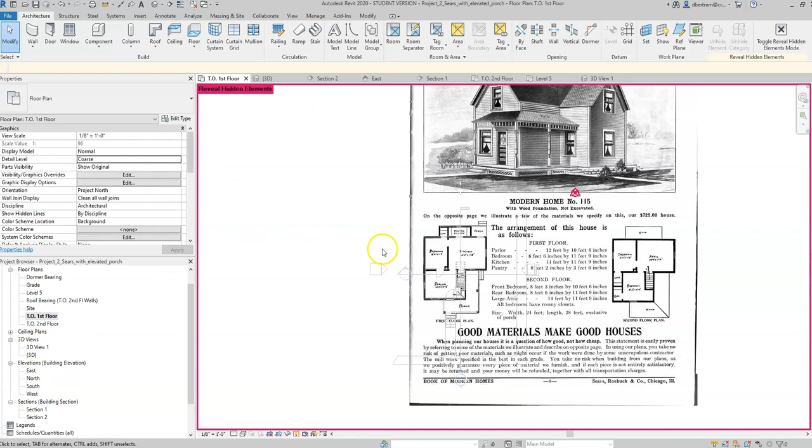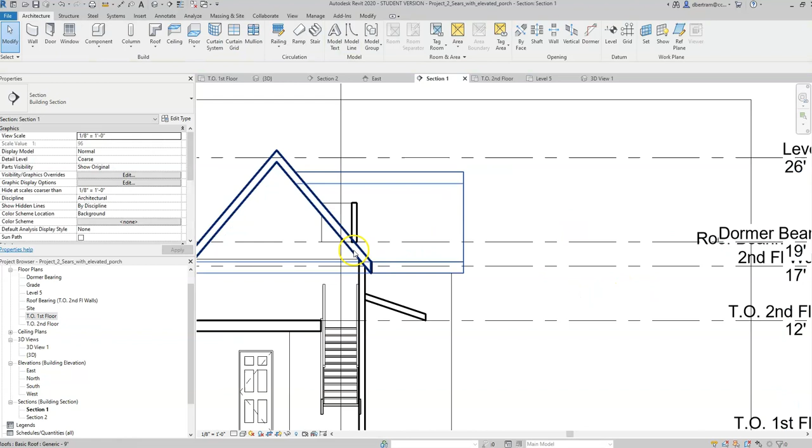Yeah, so not bad. And then, of course, we'd want to look at it in section. And then we could determine, for instance, that maybe the roof dormer wants to actually come down - maybe it wants to be at 19.3. And then we could manipulate it that way, and it actually would want to cut through this roof, and that would get cut off.